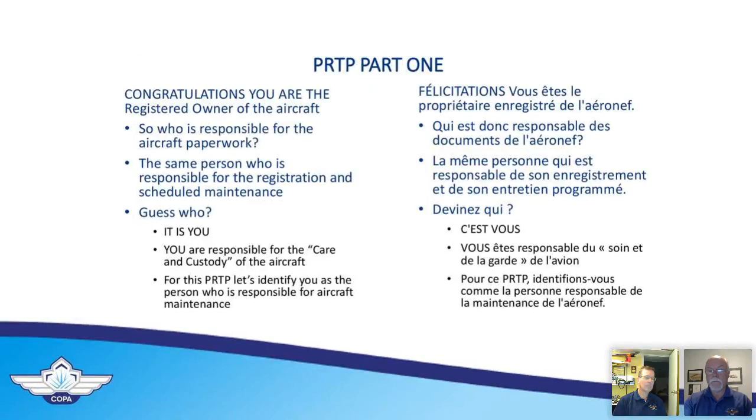Did I jump? No, I didn't. Okay, all right.

So what do we talk about with care and custody? What does that mean? Well, if you look in CARS 605-84, there's a bunch of things that come out of care and custody. One is that we want to make sure the aircraft is maintained in accordance with the type design specifications and the certificate of airworthiness for that certified aircraft, like a Cessna 172 or an Aeronca Champ. You need to be complying with all airworthiness directives and their equivalents.

You need to ensure that the original and updated weight and balance information for the aircraft is available. The most recent one should be in the aircraft documentation. Keep the aircraft weight and balance up to date if equipment or aircraft changes or upgrades are done, and meet the requirements for a change in the aircraft weight and balance.

You need to appreciate the owner's versus mechanic's roles and responsibilities. We've got a slide in a couple of moments about knowing your AME coming up.

It's very important. And Peter, one of the elements with the weight and balance - people think just because I'm switching out radios or whatever in the aircraft, I have to go and get a complete weight and balance redone. If it's a relatively minor swap out of equipment like that, you just need to amend your weight and balance equipment list - it doesn't require a full weighing and getting scales and everything else, right? Very true, sir. Well said.

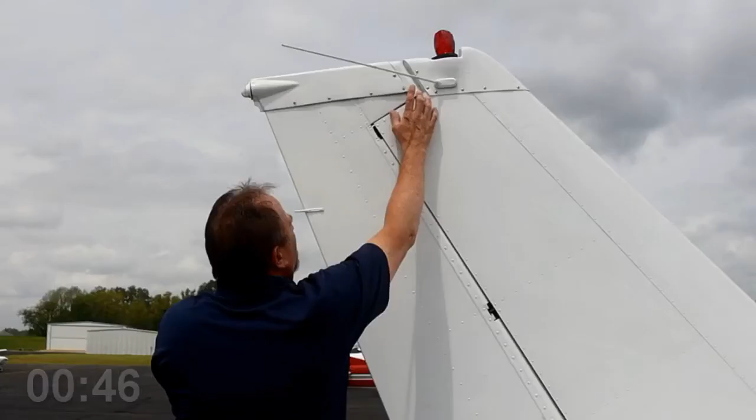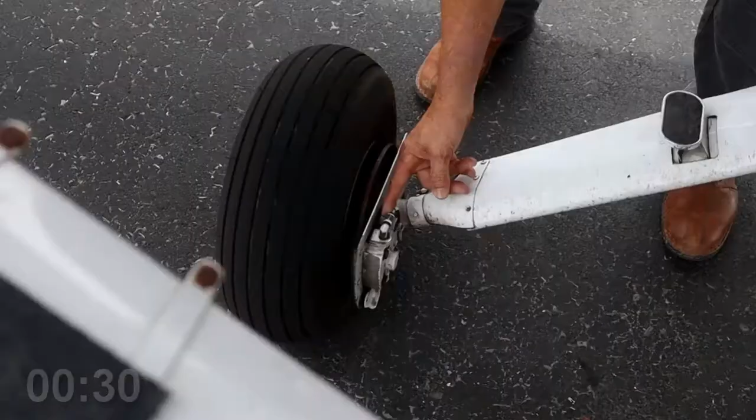Building a friendly but businesslike relationship fosters communications. When you ask the right questions and start a discussion around components of your aircraft, that mechanic might take the time to educate you on how the system works and how it integrates with other systems in your aircraft. Your understanding leads to your confidence in that mechanic to perform the work needed. The mechanic then feels you are interested in how things work. Before you know it, he or she is offering ways for you to head off other problems before they become major issues. So much of what I'm saying is common sense, but sometimes we pilots are busy and don't have the time to form that relationship.

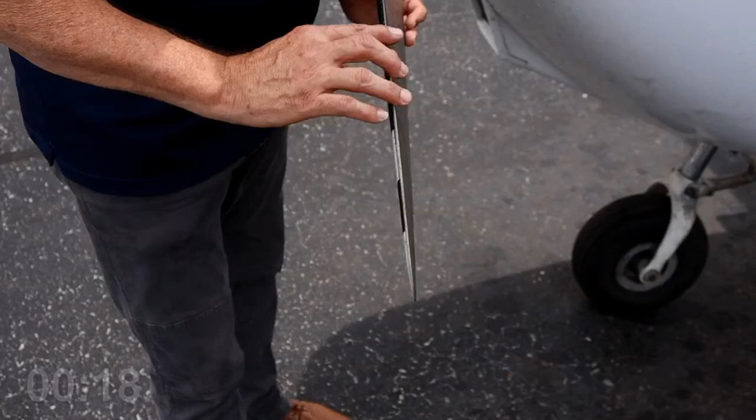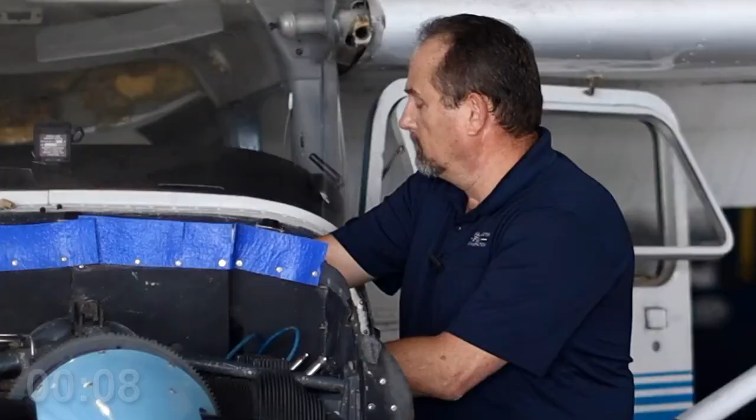Other best practices would include having the mechanic do a walk around with you when the work or inspection is ordered, and then again when it's completed. Have the mechanic show you the work plus any inspection plates, cables, hoses, clamps, castellated nuts, safety wire, anything that might have been involved in the work.

Give me a 7/16 wrench over there. A wrench.

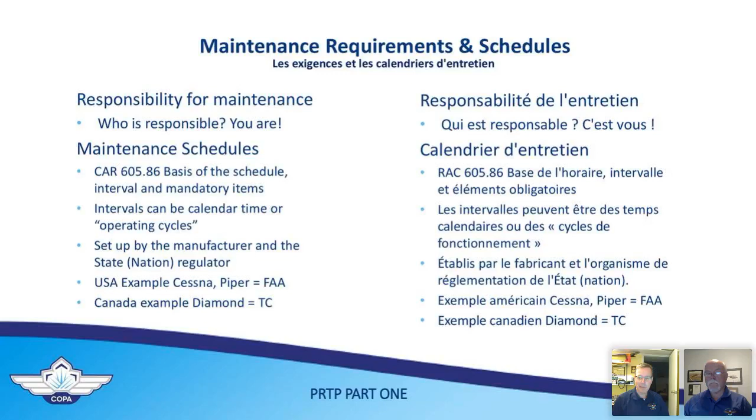Okay, thanks, Peter. And yes, you are the responsible person. I think it behooves us all to get out of this mindset that I have to have this annual done, or I have to have this 50-hour inspection if you're commercial or whatever program you're using for maintenance. It's not a have-to-have, it's a need-to-have, because I need to stay alive for my family. Sounds very harsh, but let's get realistic, folks, right? This is a big deal.

Part of this is identifying what maintenance schedule you're going to follow, and we'll talk more about that later on. It can be over intervals or operating cycles, or a manufacturer's recommended approach. I know a lot of FTUs that fly Cessna products use the Cessna progressive maintenance schedules of 50, 100, 150, 200-hour cycles which keep repeating around and around.

But for most of us weekend warriors and things like that, we're in an annual inspection cycle, and we can either follow a manufacturer's maintenance schedule, or, like most of us, use the default Transport Canada cycle. One element I'll mention here, about trying to get out of the mindset of 'I have to have the annual done'...

At our gliding club we have two tow planes: one is the Piper Pawnee, climbs like a homesick angel, and the other's a Citabria, both tail draggers. Both lead very rough lives, towing aircraft up and down, day in, day out. You get to know an aircraft after a while, and you get to know its weaknesses and strengths. Yes, we could blindly carry on and just have an annual inspection on our tow planes as we go through, but we know where the weak areas are.

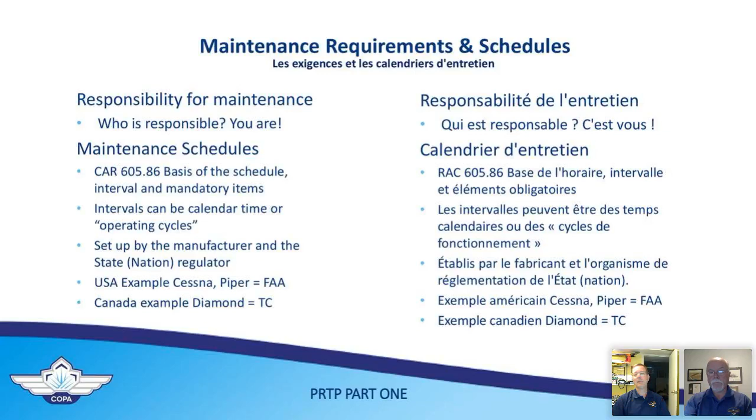Every aircraft has strengths and weaknesses, and if you get that relationship with your AME and with your aircraft, you know where they are, and you could say, you know what, I'm going to spend an extra $200 and replace these bolts for the extra hour it'll take, and I'm going to have a much more reliable, safe aircraft. So that's next level thinking, but let's worry about the basics here as we go forward. Next slide. Absolutely, well said.

My father worked a lot in maintenance, and the whole concept of preventative maintenance is good. So logbooks, where do you record the work?

Journey log, technical log, you got propeller log, you got an engine logbook. All of these elements. A good old glider is very straightforward. We use the journey log for everything, including technical work, and that's allowed in the CARs.

The use of airtime is what is entered into the books, but what documentation, you know, what maintenance has been done, even an oil change, what parts have been installed, mods to equipment lists, mods that may drive a change to center of gravity calculations or weight and balance reweighing, all those elements.

Probably one of the most overlooked things, and I catch this a lot with people, is something as simple as an oil change on your aircraft, which you're allowed to do as elementary maintenance. We'll talk more later. People are very diligent and will say in the journey log that they replaced it with W100 shell, 8 quarts, whatever the case may be.

But they won't put that in the technical log. And you need to, because it is technical work, it has to be in both the journey log and the technical log. So just a little tidbit, hopefully something you take away from the session today. If you do your oil change, just make sure you put an entry in the technical log as well.

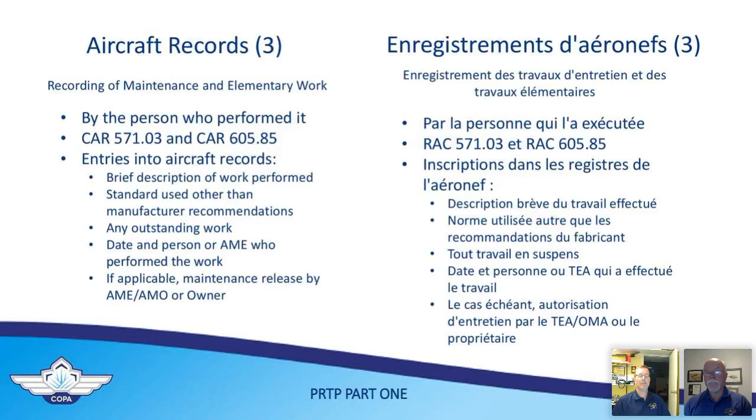Roger, do you want to add anything to what we've said here? No, I think that's a good element, that's sort of the standard entry. I'm even anal about things like when I put an extra liter of oil, a quart of oil, in an engine - I make sure I put an entry in the journey log for that too. I keep thinking the journey and technical logs are your history, and you hit it well, Peter. It's in your interest, and it's going to affect the resale value of your aircraft beyond just keeping a good history of what's happening to it. So, right on, Roger. Over to you, sir.

Okay, who's responsible? You've heard this many times, and this was a shift in the regulations - this goes back about 35 years to the old Canadian regulations, and it shifted. It used to be that the AME was responsible for checking for applicable ADs during an annual inspection or recurring maintenance activity, etc. But that changed, in that the AME is now responsible for the quality of the work and implementing the applicable airworthiness directive. But in terms of identifying what airworthiness directives are applicable to the aircraft, that's the owner's responsibility. Now, I have yet to run across an AME that is that black and white, that sits there and crosses his arms and says 'you don't tell me,' blah blah blah.

They will usually ask, but you should have a relationship with your AME. The AME I use for my glider and for my Champ - we have an excellent relationship. Part of my responsibility in preparing for annual inspections, and we have a whole different presentation on these aspects in October, is I go onto the COPA site, which we talk about later, and download applicable ADs, and I print them out. I ask: are they applicable to my serial number? Blah blah blah. I go through them and throw them in front of the AME and say, yeah, this isn't applicable, but these are. There's also been a couple of ADs that have popped out of the blue. My AME knows everything about the airworthiness and potential airworthiness issues of the aircraft to the same level that I do, and it's a mutual trust - it's a symbiotic relationship.

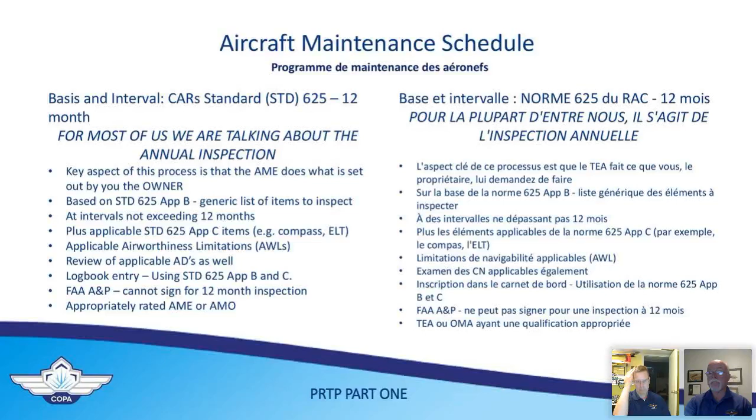All right, a little bit more work on this. Basis and interval, CAR 625. So setting up the schedule for non-commercial aircraft is really a lot of work for you to do, right? We've said before, you can follow Cessna or Piper or Beech manufactured guidelines, but in many cases, using what's in the CARs, both Appendix B and Appendix C, will flesh out a schedule.

There are also other owner groups that can help, if you've come across an airplane that you're not familiar with at all - you can use the advice of other owners groups to suggest what should be in the annual. And trust your AME as well; his or her recommendations can be part of that.

But ultimately, what you've set up needs to be appropriate, can be inspected or checked by Transport Canada. And if there is something you're missing, you do want to make sure that it gets pulled into line.

Okay, so mandatory items, maintenance schedules - all aircraft except ultralight aircraft shall be maintained in accordance with the maintenance schedule. This kind of pulls it together, or approved by the minister that complies with CAR 605 and Standard 625, which we've been talking about quite a bit here in the last few minutes.

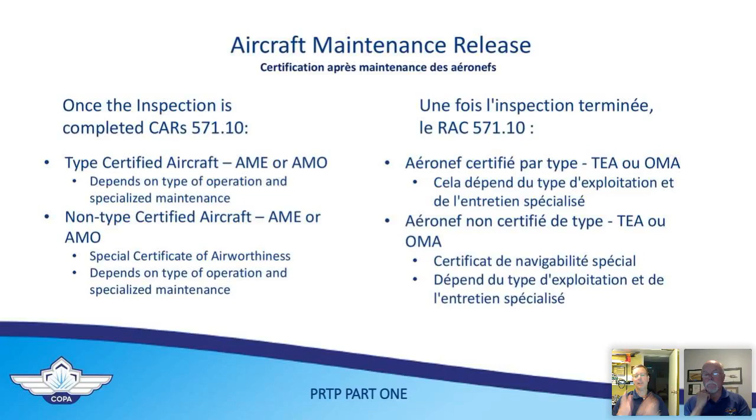Once the inspection is completed, as per CAR 571.10, you can use the appropriate wording. Whether it's owner maintenance - that is the perceived benefit of owner maintenance. I really would caution people, not to take away from anybody's technical prowess, but having worked in the aerospace industry, having another set of eyes look at your aircraft versus the same person flying it day in, day out and being exclusively responsible for the maintenance and entries - I see huge value in having another set of eyes do it.

And even the CARs support that, because for most of you, if you've had any kind of critical primary control surface removed, you realize it needs 2 signatures to have it reinstalled and checked and signed out as airworthy, because we're human beings. Part of this is recognizing that for all the processes, all the checks, all the paperwork, we're still human. Things slip through, right?

And another set of eyes will look at it and go, what's that? I'm sure most of you who've dealt a lot with your home-built aircraft and working with your local EAA chapter have heard this many times, about getting your builder assist, your sponsor going through to look at it again, having another set of eyes. So although you may go for owner maintenance, please try to keep another set of eyes engaged, and ideally an AME engaged. Very good advice, Roger.

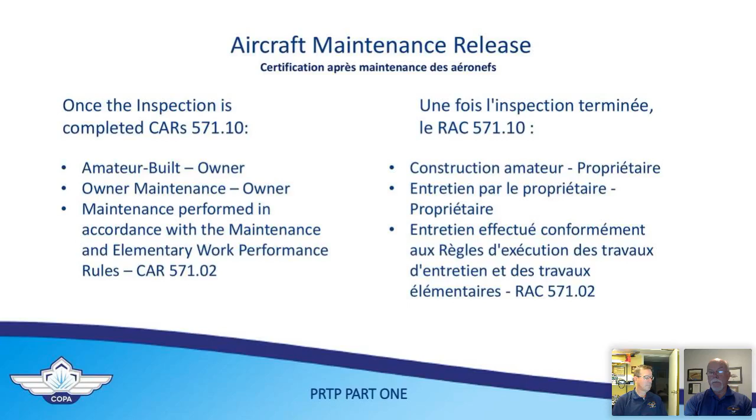If you've got any air left in your lungs, how about sharing with us the concepts of elementary work? Elementary work, yes, the 29 items that you can and can't do, right?

You can change the oil, you can change your tires, as long as, and I have this hammered into me, you're not opening a hydraulic line. You can do minor repairs to upholstery, elements like that. There's a well-defined list. With my glider, which has automatic control hookups, I can take the wings off, put it in the trailer, drive it 100 miles, put the wings back on. I can do that myself as elementary maintenance, as long as I put an entry in the journey log that says wings removed, wings attached, positive control check done. We're very disciplined, we go above and beyond in a lot of cases. So you do have a lot of latitude.

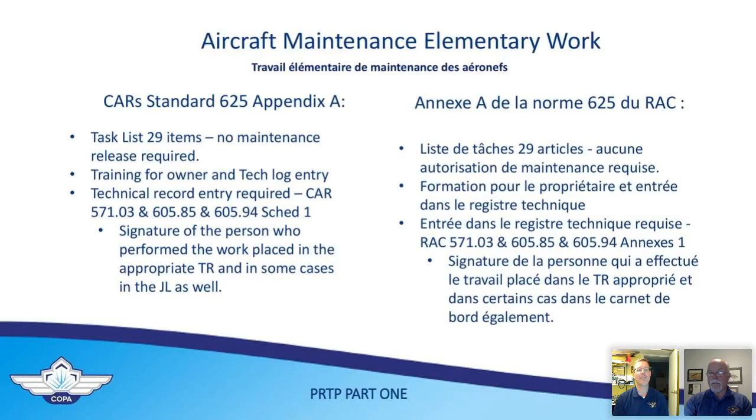If you suspect you have fouled spark plugs, you can take the spark plugs out, clean them up, and put them back in. Now if you've never done that before, this is that relationship with your AME, and your AME will probably hug you. He'll charge you for showing you, but he'll probably give you a big hug for showing you how to sandblast the spark plugs and check them out, because he's probably tired up to here of doing it 50,000 times during his career. If he can show you how to do that and you can demonstrate it, hey, you're engaged, you know what's happening. And then you can actually connect maybe the cause of those fouled plugs, saying 'man, I have to pull them all out of that O-200 again. Maybe I will actively try to lean my mixture more regularly instead of staying at full rich on that 2-hour cross country.' So little examples like that are a great way to stay involved.

So go through, take a look at CAR 625 Appendix A, and you can see what you're allowed to do. If you're unfamiliar, talk to your AME. How would you do this? What is the best practice? I'm thinking particularly when it comes to spark plugs, re-annealing the copper washers that go through to put in. The devil's in the details. We're dealing with very reliable systems, but the devil's in the details. Re-annealing the copper washer makes a big difference, and doing that properly, how to do that. So just because it's on the elementary maintenance list doesn't mean go ahead and do it. It just means you can, but your obligation to yourself, and part of that contract for you staying alive and working with your AME, is to learn about it. You might just be surprised how much more you find out about your aircraft.

And it also makes a transition, I think Roger, to helping out with annual inspections, a much more natural one, because you're already doing some of that in between annual inspection work. So you're now becoming more involved with the airplane. Exactly, we'll talk so much more about that in October. Okay, let's talk a little bit about maintenance releases.

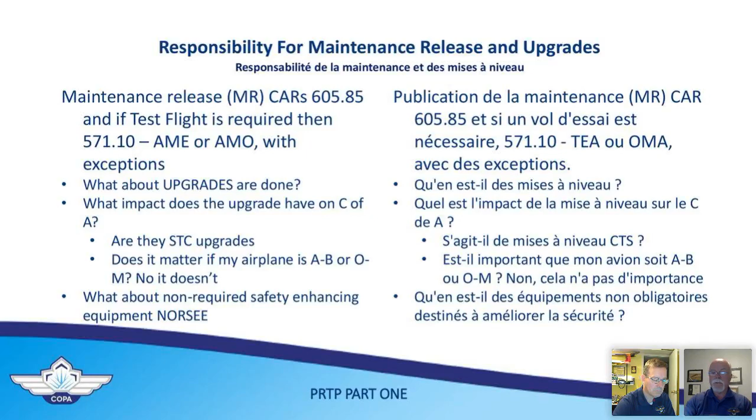It's a safety enhancement such as an angle of attack indicator or a panel mounted instrument that gives you better awareness of what's going on in your engine. For instance, an engine cylinder head temperature gauge, which was never standard equipment on a 150 - it might have been on a 172, but maybe you don't have it - or an exhaust gas temperature gauge. So if you're leaning that 150 like you should be all the time when cruising, this EGT gauge and cylinder head temperature gauge will give you better insight into what's going on inside the engine.

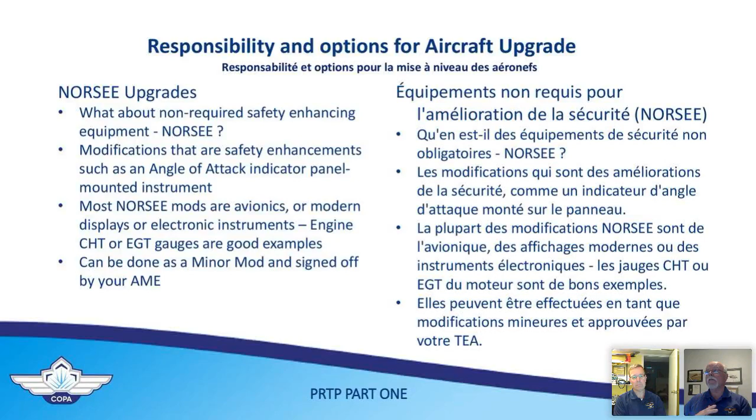One of the keys to NORSEEs is that it has to be considered by your AME, the person signing off the work, as a minor modification. If it's a minor mod and your AME is willing to sign off on it, or the AME who can sign off is willing to do the work, perfect - it's a NORSEE. If it's a major mod, then it better have an STC. We won't go there today, we'll just keep it in the NORSEE world for right now. There are great things that can enhance your safety awareness in your airplane.

All righty, okay, we talked about abnormal events a little while ago. There are 23 different occurrences. Essentially, what is an abnormal occurrence? Basically, it's anything that would invalidate the certificate of airworthiness or exceed one of the aircraft manufacturer's specification or design limits for the aircraft. And typically we're talking about certified category airplanes.

It could be as simple as an overweight takeoff or an overweight landing. If you take off overweight, you have had an abnormal event. You might not have planned it, you might have only realized it after you did a closer calculation afterwards, which you shouldn't have done but you did. Or you were doing a steep turn and maybe you got a little too close to the redline airspeed. Prop strike, hard landing - they're all there.

We're not going to talk about all of them today, we don't have time for it. But CAR 605.88 talks about what they are, and in Appendix G of 625 they're listed out. It's very straightforward - boom, boom, boom, this is an abnormal event.

And if that happens, guess what - now you have to log it in the journey log and consult with your AME, who will have to do an airworthiness inspection of the airplane to determine that the aircraft's airworthiness has not been compromised. Then the AME will sign off saying the airworthiness was not compromised by this event, which makes your airplane airworthy again, and your C of A is back in effect.

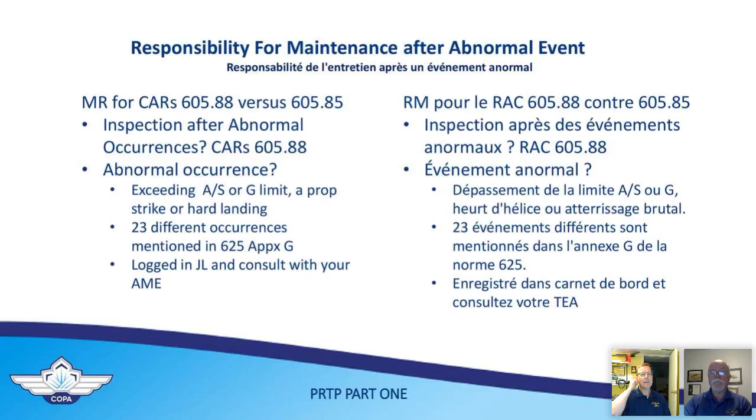Roger, over to you sir, for parts. Okay Peter. Next slide there. Thank you - parts, new parts.

Well, if you have a type certified aircraft, only approved parts can be used on it. A good indicator of those approved parts is whether or not it's got a green tag, or it may have some alternate forms - the TCCA Form 1, FAA Form, EASA Form 1. There should be some kind of form about its authorized release and certificate that will go in your technical log with it. Your AME will be looking for it.

If you are in an owner-maintained aircraft, or amateur-built aircraft or whatever, this comes into what is the value of your safety worth. Certainly there might be some other equipment that are much more reliable, far better served in your situation. But I certainly would not recommend going to Canadian Tire to get bolts, even for a small assembly. There's something to be said about the basics, staying with good solid components, even though you may not be with a type certified aircraft. So look for the tags, look for the paperwork, be suspicious if you're getting something for your type approved aircraft that doesn't have the appropriate release certificate for those parts.

Next slide. One of the things we want to say just before we move on is that all this paperwork, all these green cards, these green tags need to end up somewhere. It's not like Christmas morning where you open up the box and throw away the wrapping. Far from it. Those green tags need to go, Roger, where? The technical logbook.

Sometimes they'll be stapled to pages, and sometimes they'll be put in the pouch at the back, but it depends on your AME. But put them in there. Do not throw them away, like Peter said. That's what you're paying for.

ELTs. We'll talk two different hats here, and I'll stick strictly for GA aircraft. On commercial, we've got a little bit of a reprieve. We have until 2025, I believe - it was 5 years from 2020. November 2025 to be precise. After that, we can take all those 121.5 ELTs and use them as boat anchors for our fishing boats or whatever else, because they are no longer legal for the aircraft.

Until then, you have to do a performance and corrosion check every 12 months on those ELTs for the 121.5. And there's lots of avionics shops - they know what to do. You probably have your favorite shop to do this stuff with, but that's a 12-month requirement.

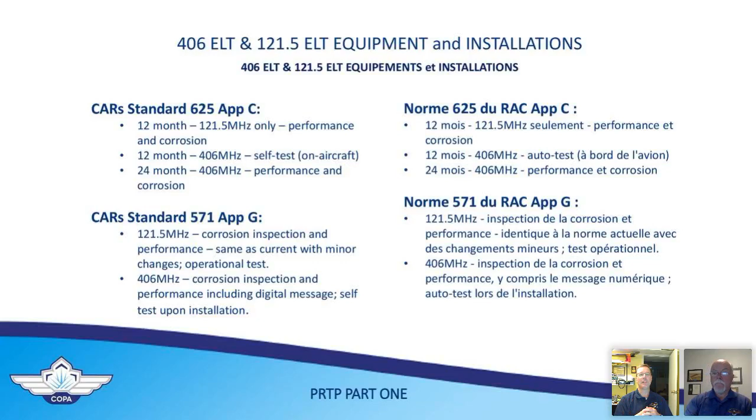There is no live testing allowed for the 406 beyond the self-test, unless you want to get some very irate phone calls from the Joint Rescue Coordination Center in Trenton, or whatever region you're in. But there is a process with the manual documentation on those elements for that. A performance test requires a removal, so going to your AME, an electrical AME, and going through that. So, operational testing, performance testing.

And then the third dynamic you've got is the scheduled maintenance, and this is things like the batteries. So independent of the 12 months, the 24 months with the 406, or the 12-month interval on the 121.5s, your batteries may be good for a year, 3 years, 2 years, depending on the manufacturer of the ELT. I hate to say it's a bit of a dog's breakfast, but you really have to understand the subtleties of your ELT - what type it is, what the manufacturer is, what the battery cycle is.

And if you were a wise consumer with your 406, you got to look at all three - not just decide what 406. You may wind up getting the cheapest 406 ELT, but the battery may need to be replaced every 12 months - not necessarily a good value. You may also find another 406 ELT where the battery has got a 3-year or 2-year period, and the price of the replacement batteries might be different.

So there's a matrix of trade studies, reliability, size, and ease of installation and use to keep in mind if you haven't already made the plunge. But it isn't just about getting a 406 ELT. You have to understand the maintenance requirements on this, and if for no other reason, it could affect your pocketbook. General aviation pilots, we're cheap by nature, but there are some things you just want to take the time to do right and put the entries in there.

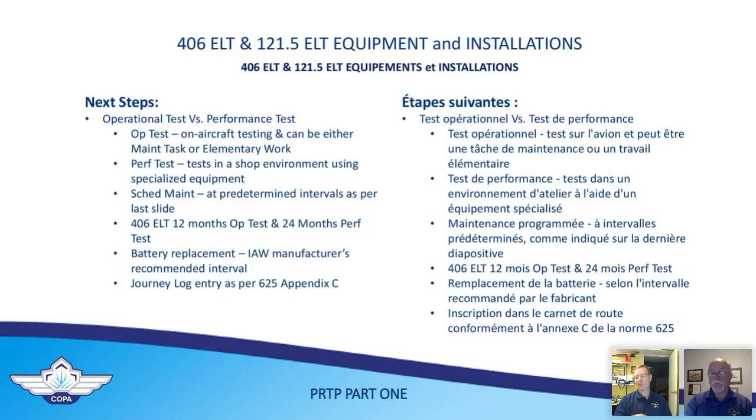Can I fly when the ELT has been removed for maintenance? You can, but like any other inoperable piece of equipment, you have to tag it out. You need to put a sticker, a decal, a card, wherever that element is, stating this ELT has been removed for service on the date, etc. It should also go in the journey log that it's been removed. And you have 30 days to get it back into the airplane.

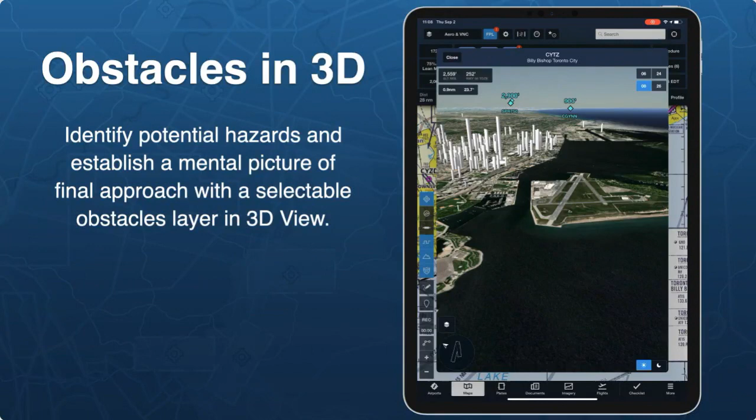This view also shows traffic, so you can see the traffic coming in, giving you good situational awareness if you're flying into an airport like Toronto City, Billy Bishop, for the first time.

You can see here there are two stacks. I have lots of experience flying and landing on runway 26, and you actually come pretty close, especially to the second stack. It's great to see this beforehand so you're ready for it and can look for it, even on a VFR flight, since you're still on that approach for runway 26.

It's nice to have that information beforehand, and you can see the two stacks as well as the city. Any obstacles, buildings, towers, or windmills within 100 feet of your altitude and higher are shown in red. It's the classic altitude red and yellow colors for hazard avoidance that all the manufacturers use. That's the highlight on 3D obstacles in ForeFlight.

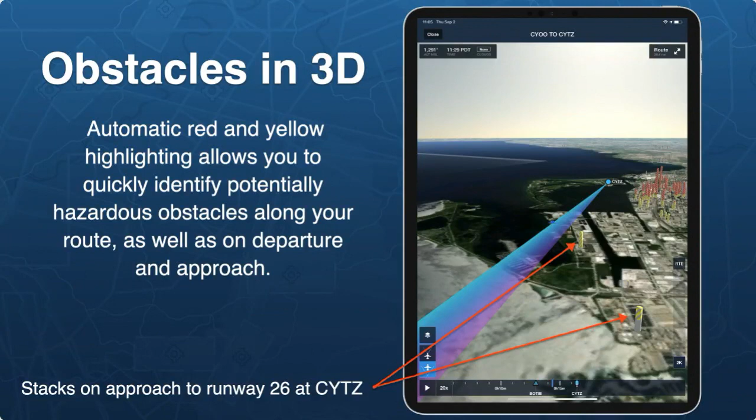So let's jump into checklists.

Checklists are a crucial aviation safety tool, and we're talking a lot about safety today. ForeFlight checklists can be implemented in so many different ways. If you haven't used it, it's got a great intuitive interface, with quite a few integrated templates. There's a Checklist Speak option we'll talk about, emergency checklists, and you can customize and share checklists. I'll also talk about creating unique checklists for different applications.

ForeFlight has flexible built-in checklist templates derived right from the POH for different aircraft. You just quickly choose your aircraft from the list, and that's a nice starting point. It may be everything you need for that aircraft, or if you want, you can add your own checklist items and edit the checklist. It's a great starting point that makes creating a checklist a lot quicker.

Checklist Speak is a fantastic feature. No copilot, no problem. You can use ForeFlight's checklist to read out the checklist items for you. I've used this in flight and it works great, even better if you have a headset connected via wired connection to your iPad or Bluetooth if your headset supports that. Then the checklist is read out right in your headset, which is perfect.

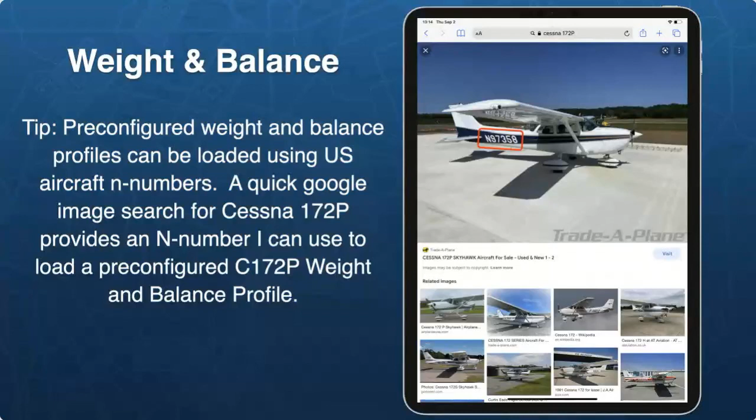All right, so I'm going to skip this slide. It's just showing setting up a new weight and balance profile. If you have any questions on this, for time's sake, I'm going to jump over it, but please send an email to team@foreflight.com with any questions. There's a weight and balance guide you can get in the documents page as well in ForeFlight, so you can look that up if you have any issues creating a profile.

So I want to cover, since we're talking about aircraft maintenance, a tip for maintenance tracking in ForeFlight Logbook, which is a nice little item you can use ForeFlight Logbook for. ForeFlight Logbook is available in all subscriptions, all our standard subscriptions plus the plus subscriptions we have available: Basic Plus, Pro Plus, and Performance Plus.

And you have an option under qualifications to create a certificate, and you can use the certificate to track maintenance items. I've seen many pilots do this. I've done this myself. It's great for putting in oil changes and annuals and pitot-static checks, et cetera, anything you might want to track.

So you're simply going to tap the plus button at the top under the Logbook qualifications page. You can enter a title for the certificate, so annual inspection in this case. If you want to enter some type of number associated with the annual, you can do that, or your aircraft registration.

Next slide, Peter. So a POH or AFM — some of the airline folks will call it different things. I get teased all the time by a lot of our retired Air Canada captains at the gliding club and at the power club I fly at Smiths Falls. But we'll call it a POH.

It has to contain all the amendments and supplementary material. I talked about ADs as being a vehicle to include amendments or supplementary data that may change due to various incidents, so there may be amendments that have to be up to date. There should be a change page — a good idea if you've got a legitimate POH is to take a look and see if there's a change page at the front end of it. A lot of times if you have to update the POH, you've got to put an updated page for the change page. And it has to be available to all crew members at their duty stations.

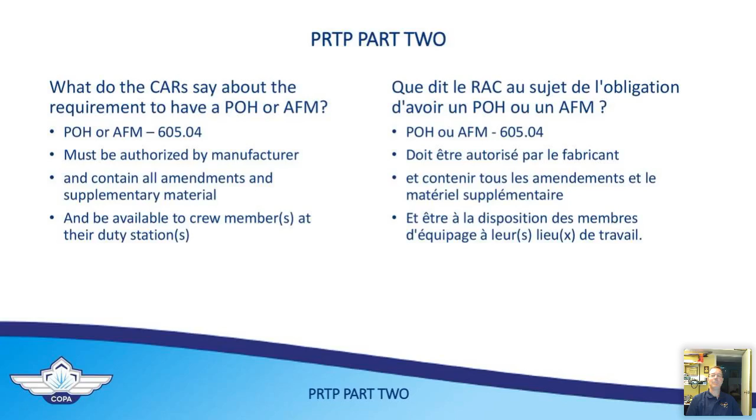You've got to have it available. It could be electronic, it could be paper, as long as it's tied to that aircraft, that model, and it is up to date and current with the appropriate amendments. Over to you, Peter. Well said, sir. Thank you, Roger.

So, keeping on this theme about what do we need to go flying, there's a CAR that talks about, CAR 605.05, that talks about markings and placards. Again, I ask the question, what the hell are we talking about? What is markings? What are placards?

Markings are all those fancy things on the instruments that tell you where the red line is, the white line, the blue line, the yellow line, all those things. All aircraft cockpit markings must be in accordance with the aircraft manufacturer's original markings for the airplane. So if you've got a 50-year-old airplane, or maybe even older, are all the instruments in the right spot, in accordance with what the manufacturer specified back then? And if not, is there something in the books that says this altimeter or airspeed indicator replaces the one that came with the aircraft originally?

The second part of that is placards - we're not talking about protest signs. We're talking about unserviceable or removed items that must be placarded or made obvious to the pilot when he or she gets in the airplane. Does this work? Does that radio work? Does this VSI work? Does this EGT gauge work? If it's not working, there has to be a sign saying this gauge doesn't work, or it has to be removed. And the removed item, where there's now nothing, needs a little placard saying VSI removed or EGT removed, in accordance with what was supposed to be in the aircraft originally.

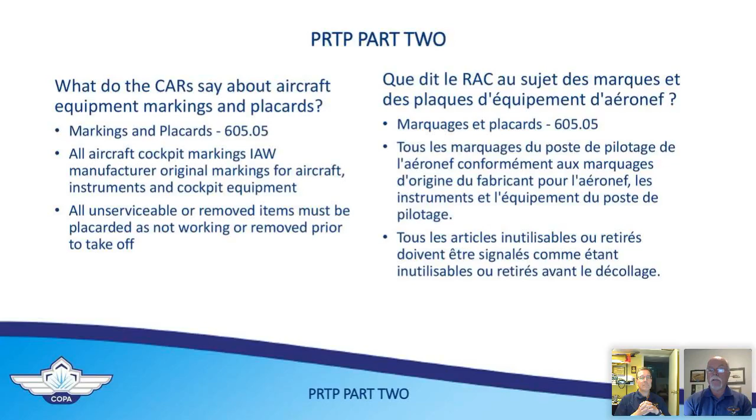So what do the CARs say about aircraft equipment serviceability? It's pretty simple - 605.06 says the aircraft cannot take off unless the required equipment is on board and is serviceable and functioning normally. Interesting that it's prior to takeoff - if something breaks during the flight, it breaks during flight. But prior to takeoff, all that stuff that is supposed to be there and functioning normally has to be working. If it isn't working, has it been placarded? If it hasn't been placarded and it's not working, guess what? We're not airworthy. More on that later.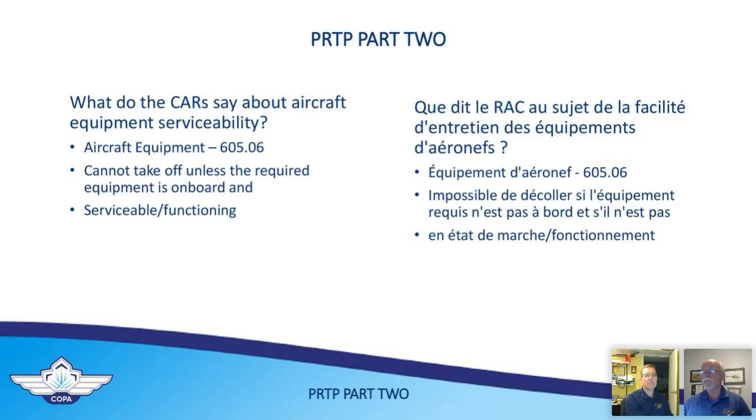Roger, how about you talking about MELs, my brother? Okay, MELs - minimum equipment lists. For most of the GA aircraft we fly, we usually don't have a list of items that may be unserviceable. Of course, the more sophisticated the aircraft or platform, the more of that you'll have. I keep being reminded that if most people knew what list of unserviceable items were on every aircraft flying with any airline, you'd probably be jaw-dropped, but they're built to different standards with triple or quadruple redundancy in a lot of cases, and it's quite acceptable to do that.

However, if your airspeed indicator isn't working in your Cherokee, that's kind of a go, no-go item right off the top. So basically, we have a minimum equipment list that is required for day VFR, for night VFR, for IFR as well, VFR over the top. They're all different lists, and it's dynamic. And then you get subtleties - I'll jump at the night equipment list where you have to have a landing light if you're carrying a passenger, but you don't if you're flying by yourself. So you get these little quirks in the regulations that are useful to know.

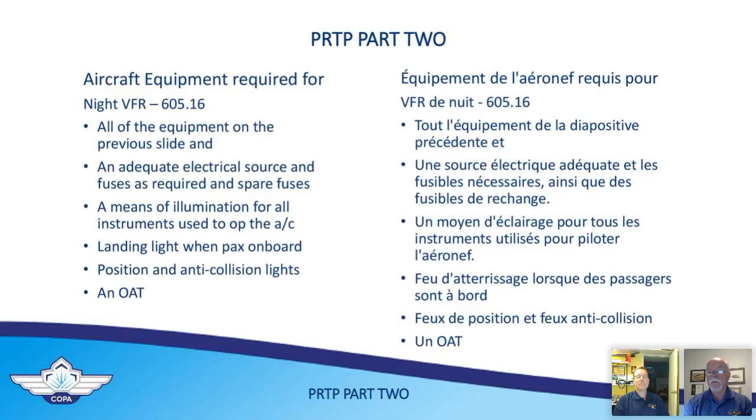And one last type of flying, IFR, Instrument Flight Rule 605.18. So all the equipment we've seen, we've been building and building and building. We need to have a power failure warning for our vacuum-driven instruments, some kind of gauge that says, by the way, hello, you just lost your vacuum pump.

Because if you're flying IFR and you're now in instrument meteorological conditions, if you have no artificial horizon or directional gyro, life could get really, really interesting. An alternate static source for your altimeter and your pitot-static system.

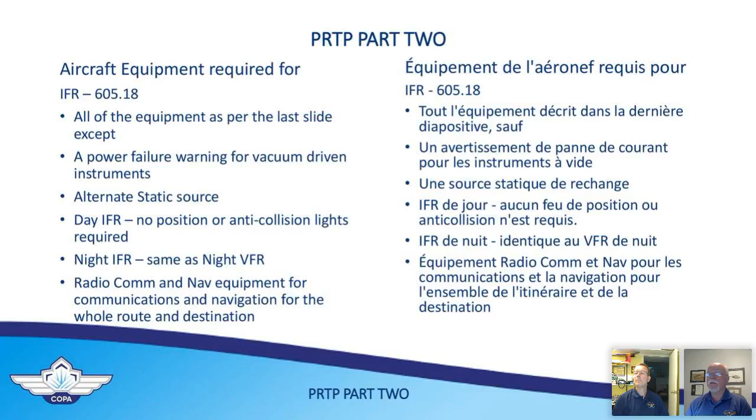If you're in day IFR, you do not need position or anti-collision lights. Interesting. But for night IFR, it's the same as night VFR. Radio, comms and nav equipment, of course, as applicable for the whole route and destination, including your alternate. There's no point going somewhere that you can't talk to people or do an approach there when you get there.

All right, so that is the different types of categories. So I'm going to turn over now to Roger, and we're going to talk about snag detection and the next steps.

Okay, thanks Peter. So part of the recognition of snag detection is that not everything is perfect, including a machine, heaven forbid. So if you have a good relationship with your AME, coming back to our theme of your partnership with your AME, you will know the weak areas of your aircraft, the areas that your AME has that kind of aircraft whisperer second sense that knows where to look and says, this is typically a problem on Pipers, this is a problem on Mooneys, this is a problem on even Van's aircraft for that matter.

And they almost can sense it. The AMEs that I know and really trust, it's unbelievable that in 5 minutes, 10 minutes, they'll go in, they'll find something and they'll say, it's not broken, it doesn't look like it's failed, but keep an eye on this.

And those are the areas when you do your walk around, you should be looking very closely at. Any Cessna that has electrically operated flaps, check the tracks, check the mechanism, because for better or for worse, that seems to be a regular item, particularly on heavy use Cessnas, that the flaps may hang up or something like that.

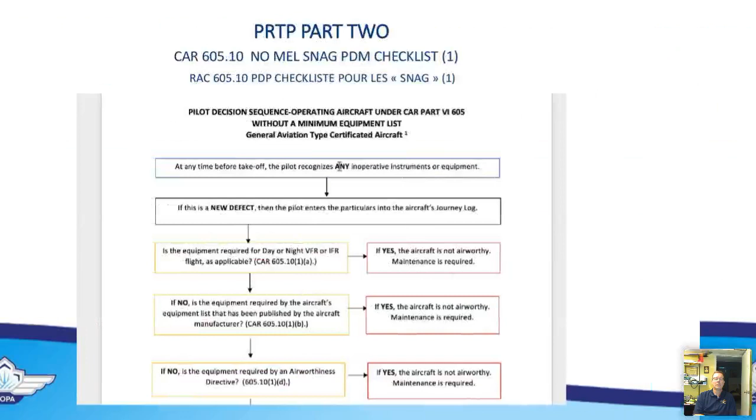But anytime there's an airworthiness directive or something that's now broken, then under the CARs the aircraft is broken and maintenance is required. The responsibility we're trying to get into people's heads is that they have a responsibility not only to themselves but to their passengers and to the regulations, which essentially say we need to be responsible about how we maintain our airplanes. So there are a couple of specific CARs.

There are CARs 605.09 and 605.10. You can, under very specific circumstances, conduct a takeoff in an aircraft that has equipment that is not serviceable or from which equipment has been removed, where the aircraft is operating in accordance with a flight permit issued specifically for that purpose.

Typically you're not going to have a flight permit to go flying recreationally. A flight permit is something very specific, where maybe you got into the situation this checklist helped you with, and you determined, hey, my airplane's broken. But guess what, I'm not at my AME's location. He or she is 100 miles away from me.

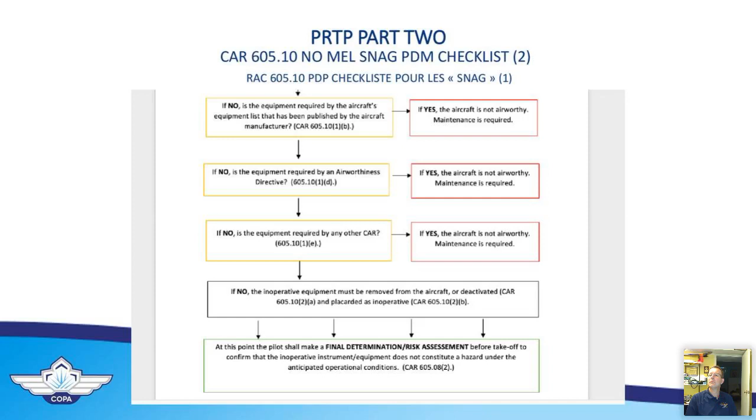And he or she can't get to me. So how do I get to my AME, because there's nobody else at the field where you're at? That's what the flight permit is for. So there are always legal, safe, smart alternatives to doing the other thing, which is to ignore it and take the airplane flying anyway. That's against the rules, but we're trying to get you to not even go there in the first place, by having a very aware, smart look at the way things are supposed to be done.

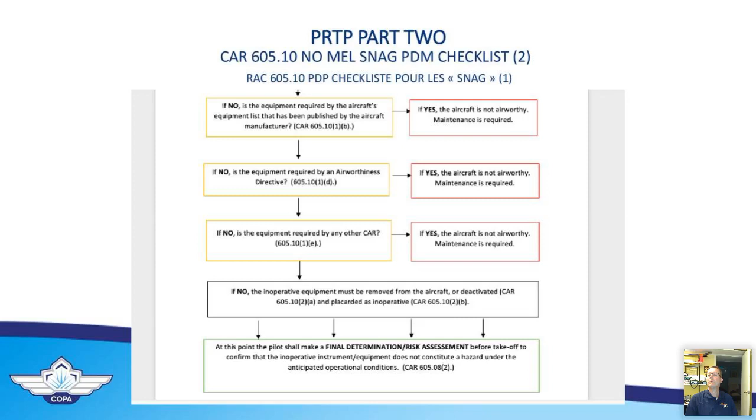Alright, so that brings us to the end of part 2. We're going to jump into part 3 now, and start talking about the topics of safety and continuing airworthiness.

The intent here is that most certified aircraft have been around for a while, and even ones like Roger's Champ, that was built just yesterday - no, not exactly - we want to keep that airplane flying as long as possible.

Things like airworthiness directives, you've heard us talk about before and we're going to talk about a lot more right now, are things put out by the aircraft manufacturer or the aircraft engine manufacturer to continue to keep our aircraft and its systems airworthy, meaning safe to fly.

We also have things called CASAs in Canada, Civil Aviation Safety Alerts. They're part of a system of reports, things like service difficulty reports, alerts, aircraft service bulletins, and letters. They make up a Canadian database called CAWIS for short, the Continuing Airworthiness Web Information System. What a mouthful. In French it's le Système Web d'Information sur le maintien de la navigabilité, SWIM. I like that one, that's cool.

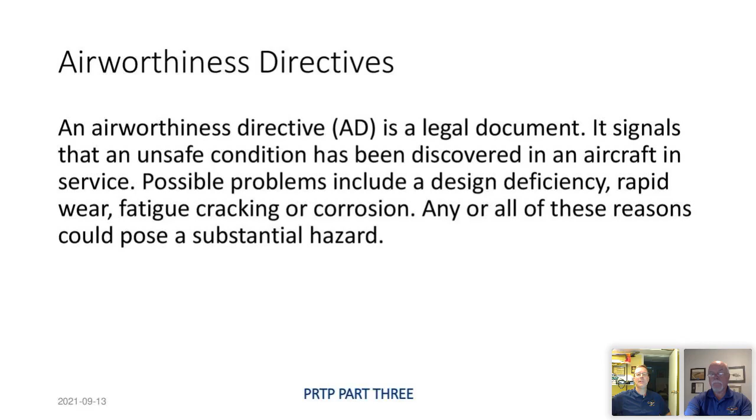And even if they say within the next 25 hours, if that's the time limit, I'd like to probably have it done in the next 3 or 4, but that's just me, because I know there's something that has potentially caused problems with it. So it's going to cause a substantial hazard, and there will be a network internationally to issue these across to the appropriate airworthiness agencies across the world.

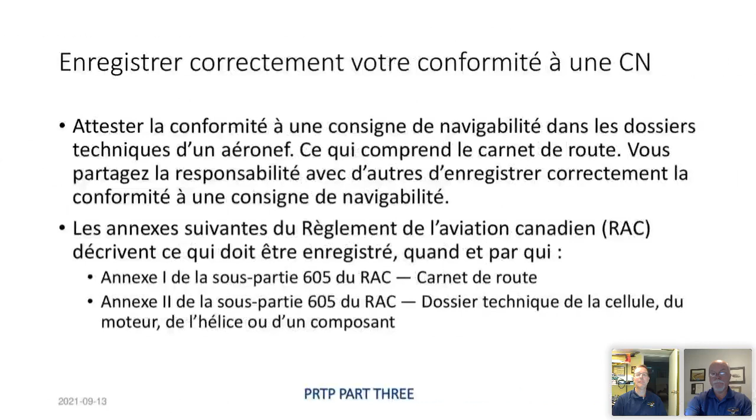ADs are optional for the following aircraft: amateur built and owner maintained. But I know, like the Vans site, they almost run a pseudo AD system with their service bulletins, I would almost consider their AD site, and you want to learn, you want to keep tabs of this stuff. This is where you don't want to cut corners. So even if you have an owner maintained aircraft that you've taken out of certified category, it's probably worthwhile keeping close tabs on these types of ADs.

The other flavor is don't dismiss service bulletins either, as Peter alluded to. Service difficulty bulletins or service bulletins are usually the forerunner to an AD. In a lot of cases they may result in an AD a year or two from now, but I have no intention of proving that theory out with my aircraft. So I like to look at service bulletins and say, yeah, let's take a gander at this and go through.

And I've actually raised service difficulty requests. One in particular was with the landing gear extension mechanism on my glider many years ago. Came in, had a nice long flight, went into the circuit, tried to put my landing gear down, couldn't get it extended. So from 1,000 AGL to landing time, that in a glider is about 40 to 50 seconds.

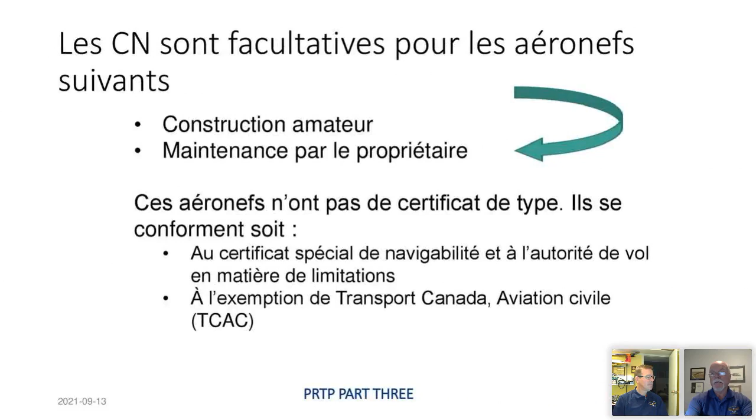That also covers my next slide here, this idea that 'I don't own a type certified aircraft, I'm an amateur build.' Well, sure, but you know what? If a particular airworthiness directive applies to your aircraft, maybe not, but maybe to your engine. Like a Lycoming O or IO 360, or maybe you've got a special type of propeller, whether it's fixed or constant speed. There may be an airworthiness directive that comes with that. Your engine, for instance, if it's not brand new when you bought it, and it may not be brand new if you decide at some point to part your airplane out and sell it off, and that engine or propeller ends up going on a type certified airplane, your compliance with the airworthiness directives that were applicable to that engine or propeller when it was on your airframe now are even more important.

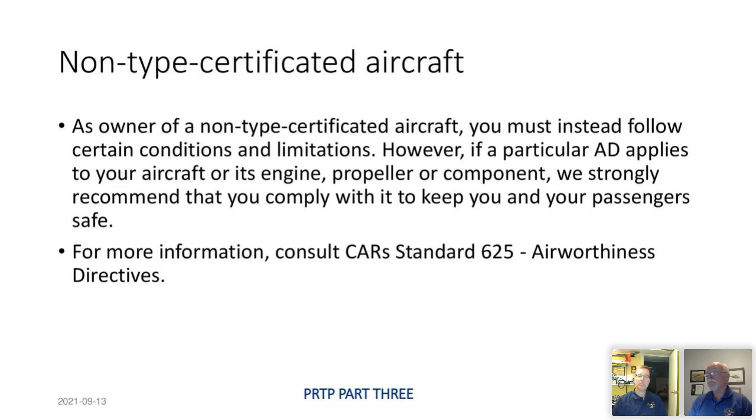So, value-wise, well, yeah, the engine's only got 100 hours on it, but I didn't comply with any ADs in the meantime, maybe your aircraft engine is worth almost nothing now. So we strongly recommend you comply with all of these airworthiness directives that apply not just to the airframe itself, but also the engine, propeller, or component, and it also helps keep you and your passengers safe. And CAR 625 ADs, Appendix H, is something you really want to have a good look at.

All right, let's go one more time here. We do want you to follow airworthiness directives closely. Sometimes they're amended. An airworthiness directive that once didn't apply to your aircraft may all of a sudden change and apply. AD checks are important to have, right? The AIM, Transport Canada publication 14371, Airworthiness Directives, is right in the AIM. It's right there, right?

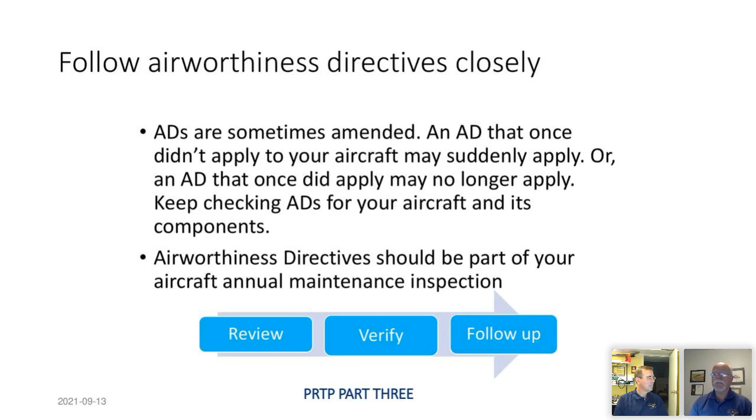Let's turn this over to Roger for the next one. Oops, yeah, there we go. Over to you, sir. All right, Peter, thank you.

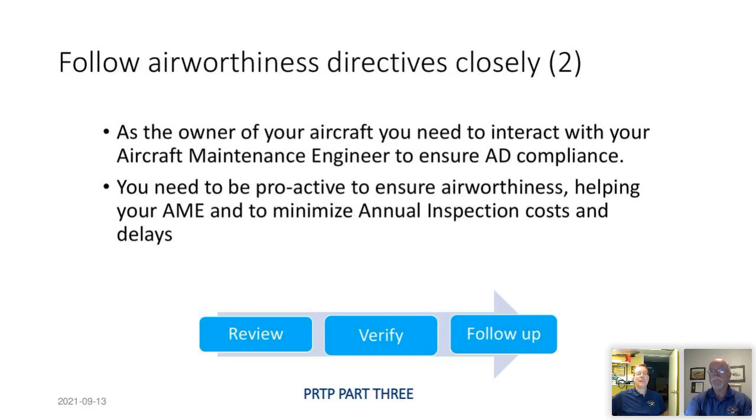So we have a wonderful website, as Peter alluded to, the CAWIS website. You don't need a login or password, so don't worry, it's not another password to lose, except for your annual report that you've got to file for your aircraft, your annual airworthiness report. There you've got to log in. But to pull out the applicable ADs for your aircraft, you can just pull them out any time of the day, 24/7. There is no reason to say you don't know.

Go ahead, Peter. No, there you are. There you are, there, Roger. If you want to mention the key to a lot of this is the AAIR, right?

Yeah, your AAIR is also part of that push of information, not just the pull in the system, right? It is a bi-directional system, and it may seem trivial to fill out the AAIR every year and put the number of hours you've flown and all that, but that can all be correlated to any SDRs that come up on that type of model, etc., back and forth across. This is a maintenance and airworthiness system. It's a living, breathing animal because no aircraft is perfect. So we're in this endeavor where we have imperfect pilots flying imperfect aircraft, and so we need some pretty good systems to catch those weaknesses, right?

It's just a fact of life. The other thing that's important to take out of this slide is that it doesn't matter if it was a Cessna, a Beech, a Piper, or something else built in the States, or a Diamond built in Canada, or a Pipistrel built in Europe. All these manufacturers are all interlinked. If they know that you own one of those airplanes, the information will get to you. But the key is that people need to know that you own the airplane.

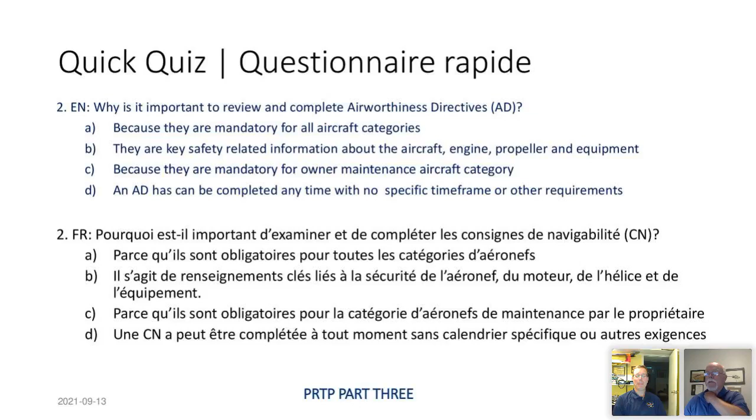All right, Roger, why don't you ask this question? Why is it important to review and complete airworthiness directives? I think we talked enough about this one today. Going through - because there's safety and you want to stay alive, right? And you want to stay mandatory, but it's not mandatory for owner maintenance aircraft. It's advisable. It's definitely B for sure.

All right, Roger, I'm going to let you take the helm here, and why don't we jump to that one - here's the CAWIS website, and then Roger, if you want to share your screen after that. Okay, so when you Google CAWIS you'll get to this page, and you can scroll down, and on the left-hand side you'll see quick search, and that can get you to the ADs. And when you go pull up an AD, let me bring up a screen here.

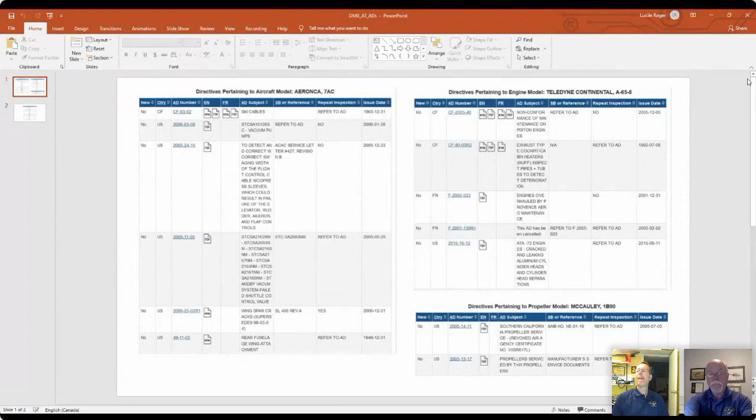There, and I'll be sharing - is that coming up? Is that full screen? Is that better now? Not yet, but sometimes it takes a second to get through the internet. Let me know when you can see it. If not, I'll shrink it here. Not yet? Oh, hang on, maybe I had the wrong screen here. Is that coming up now? I still see two pages, so... oops, hang on, there, I'll get rid of that. No, it's only showing the one. Move that down, how about that? It's not bad, it's okay. I think what people see, it's a bit of an eye chart for sure. It's fuzzy.

Apologies, folks, but what people see on their screens - Roger, I'll turn the mic back over to you - but this is what you see for your airplane. So tell us what we're looking at here, Roger. What I did is I put in the registration for my Champ, and it highlights three flavors of ADs. Apologies again, but some of these directives go back to 1948, 1949. Some are as recent as 2015, 2013.

And oops, what happened? I think I lost the screen. Can you still see it? I just see white now. Oh, that's interesting. Let me stop sharing and go back. Hang on. There. Oh, interesting. Now Roger, when you're sharing, are you adding only the screen, the window? Yeah, how's that, is it coming back? Yeah, it's back where it was. We'll just leave it at this. Okay, we'll leave it there.

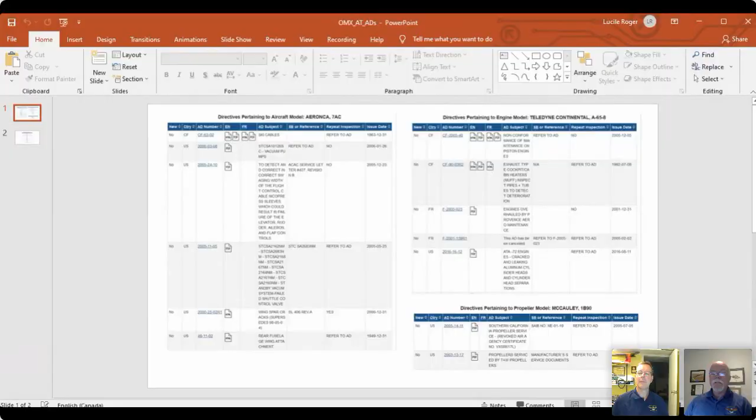All right, so ladies and gents, we are now finished with part 3. We're going to jump ahead into part 4, and we're going to start kind of summarizing, but not quite yet. So, okay, did I get ahead of myself?

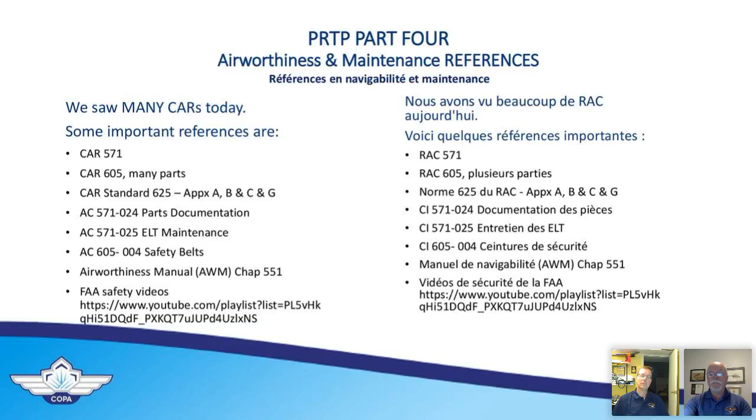CAR 600, but in this case specifically 605, many aspects of flight operations - that's where we saw our different standards for day VFR, night VFR, VFR over the top, and IFR, right? The standards that go with 605, appendixes A, B, C and G, and others - parts documentation, ELT maintenance, safety belts, the airworthiness manual. One thing I will repeat is getting to know the FAA's safety videos - there is a wealth of great references for making us smarter about our aircraft ownership life.